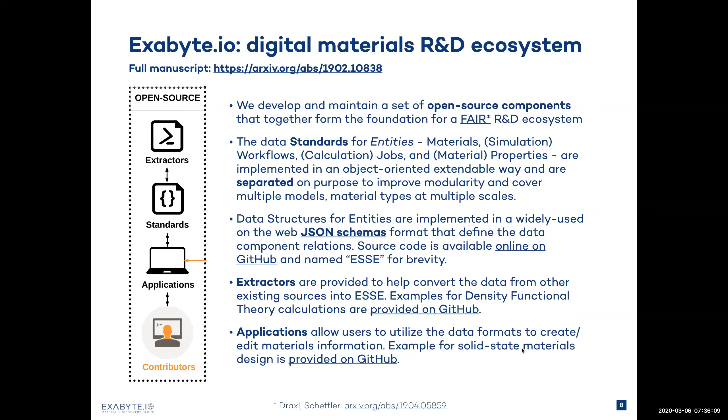Lastly, the applications allow users to utilize the data formats to create and edit materials information. We have a couple of examples of JavaScript standalone applications that we use inside our platform as well.

Here is the platform as it's added to the open source component. Again, we reuse the open source components inside platform.exabyte.io, accessible to everybody. These components can be further licensed and deployed in a private scenario too, for people who feel sensitive about sharing their data. We start with computational materials sciences as the very well-known scenario to us.

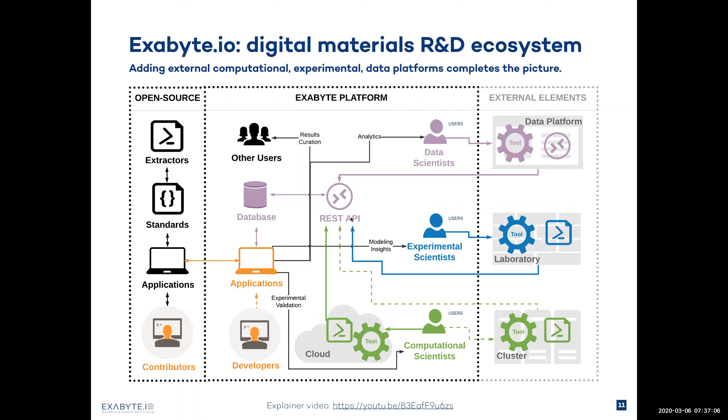But we also support data science workflows and have on the roadmap support for experimental scientists and their work. In the last two cases, we would necessarily have to add external elements like the data platform that data scientists work with today, and the laboratory equipment that can provide validation data points to our data infrastructure, to make sure that the work computational scientists are doing in fact represents experiments very well.

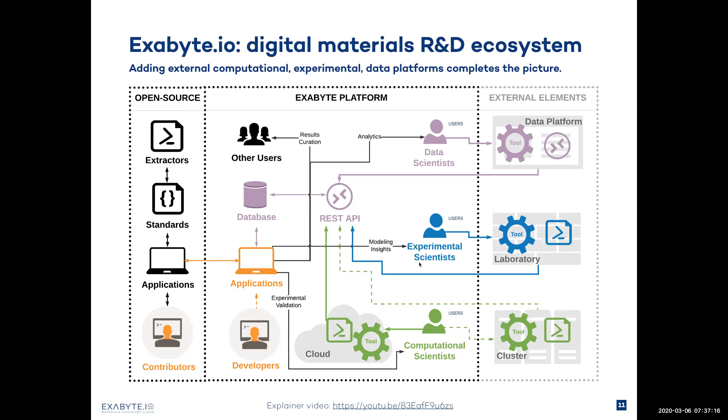If we think about the digital materials R&D lifecycle, we can identify 7 different stages: designing materials, designing modeling workflows, provisioning high-performance computing infrastructure, controlling the calculations, collecting the data, and building data analytics. The way we position the platform is to provide all of these steps within one single framework.

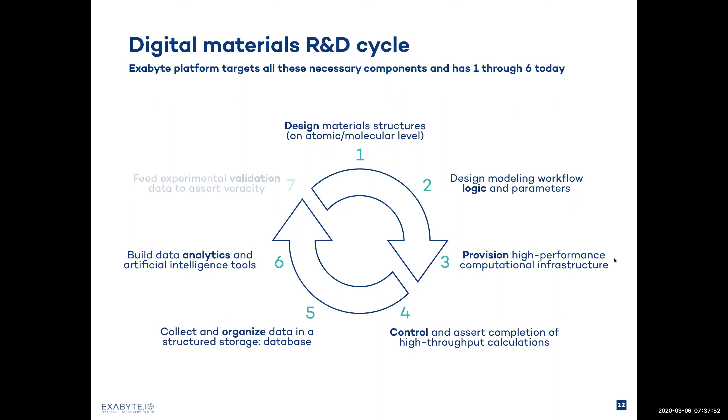I will demonstrate some of this to you right now. First, here is an example account page, and you can see there are multiple people listed on this account, and multiple entities like materials, workflows, and calculation jobs. There is a snapshot of the infrastructure available to this account and a bit about its current state.

So when people want to design new materials, they can do that online. Here is a quick example for a semiconductor thin film supercell.

Another functionality comes from the chemistry domain and nudged elastic band calculations, where we can set up the chemical reaction path and code it in at the atomic level. In this case, we see the hydrogen atom moving inside a larger cell, representing a chemical reaction.

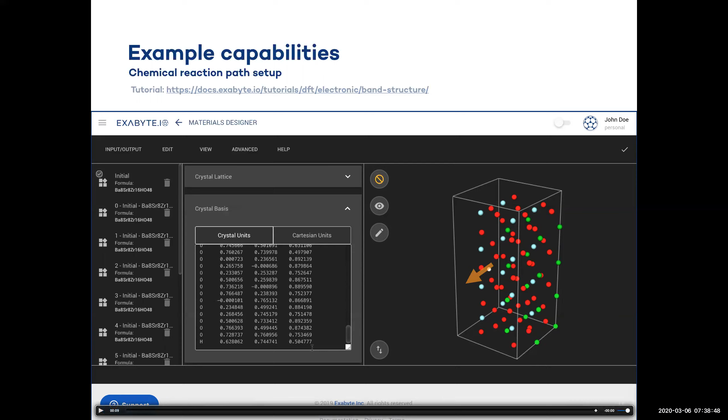Once we have the structures, we can set up the calculation workflows that can characterize these material structures. We have a set of workflows that are templated and available for users to select, and each of these workflows, when selected, represents a certain logical flow.

As you can see here, for example, we have a relaxation at first, and then we do convergence, and then at the end we calculate the desired property.

So the workflow engine is included into the platform, as well as the computational infrastructure. We can select to run either on Amazon Web Services or Microsoft Azure, scale to a certain number of cores, computational nodes, all of that is included.

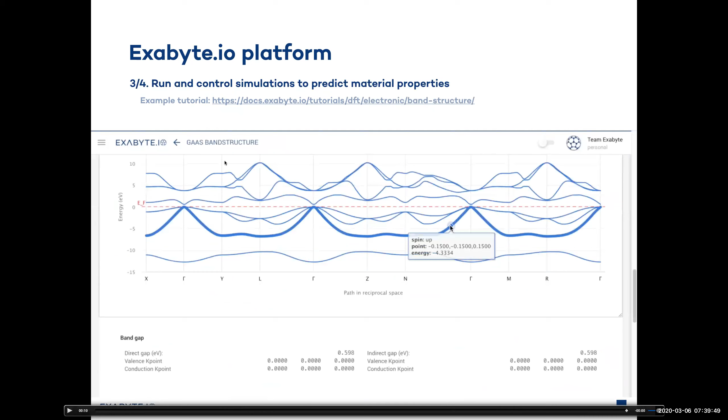Once we're done with the setup, we can execute the simulation and track its progress, as this visual demonstrates. At the end, when the calculation is done, we get the result in the form of a figure, like the band structure in this case, or the chemical reaction profile for the NEB images that we initially created.

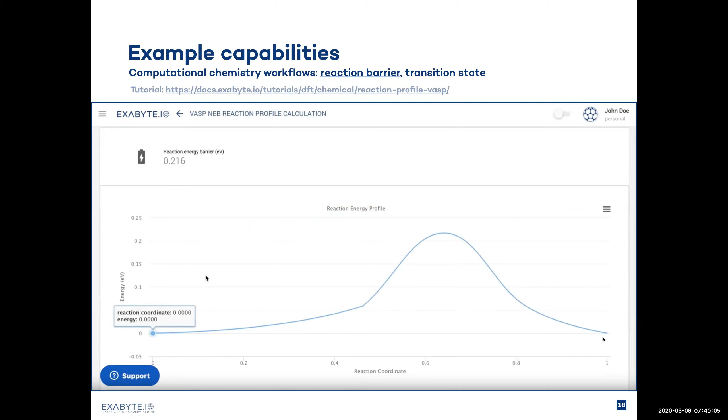All of this information is stored in a database that can be accessed programmatically through the RESTful API. Most of the time when people repeatedly run these calculations, they have some sort of scripting routines that they prefer, and we support programmatic access to our platform too.

In this demonstration, we use Python to import materials, create calculation jobs, wait for them to finish, and then assemble a data frame that can be used to build a machine learning model. This is handy when we have a high throughput set of calculations, perhaps running through dozens or hundreds of different material formulations.

All right, this is just a quick demonstration. Another handy tool we have incorporated into the platform is Jupyter Notebooks. The data produced by simulations can be accessed within the Jupyter runtime, and because they run on the same infrastructure, they have access to the same exact hardware and data.

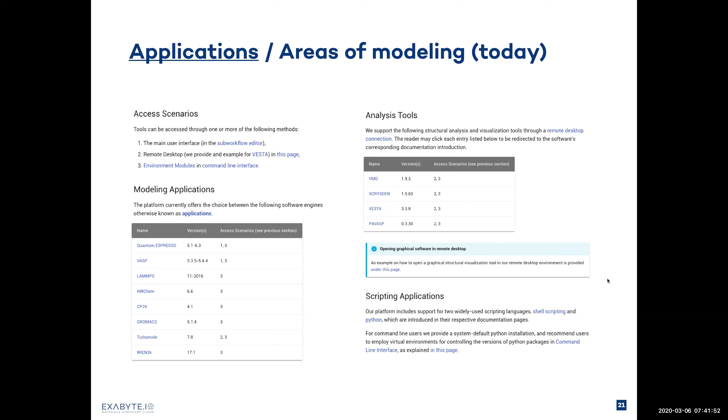For analysis tools, we support VMD, XCrySDen, Vesta, and we can install other analysis tools that our users would like to use. We also have support for Python and shell scripting at the core, and Jupyter, as I just demonstrated.

All of these tools can also be accessed at the command line level. People who are familiar with that workflow can set up batch scripts and submit those for execution to our resource management system, and they can select environment modules to be used within the batch scripts.

Here is a quick demonstration when we open a web terminal. We navigate to the web platform, select terminal from the right-hand sidebar, and then we can use the command line terminal from the browser.

Okay, so I'm done with the first part of this overview. Here is the midway summary. Exabyte.io is really a comprehensive ecosystem for materials and chemicals R&D, and our goal is to transition today's isolated, fragmented approach to a data infrastructure that is ready for data-driven science.

Today, we see a transition from simulations-driven or theoretical-driven science to data-driven science, where sometimes we don't know the underlying equations, but we can still apply artificial intelligence to see the trends inside the data that we produce.

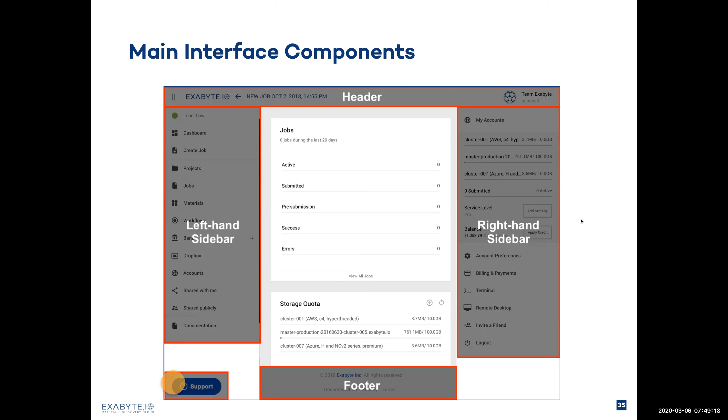So let's start with the support widget because that's the most important component in the beginning. So when you click on the support widget, it opens up this form where we ask for your name, your email address, and a little explanation of the problem. We encourage people to submit a screenshot or screencast of the problem because otherwise it is very difficult for us to understand the nature of it. Sometimes this could be an interactive chat when we have people standing by to answer the questions. And most of the time it will be this form.

There is also a chat window present on the right side of the screen, but we discourage the use of it. It's only meant for the people who are not logged in yet to assist with any kind of problems during the registration, during the login process.

Next, let's speak about the header. So in the header, we have in the top left corner a trigger that can open the left-hand sidebar. Okay, and here we have links to all the entities that are created by this account, including materials, jobs, workflows, and others. So here, once we click on the left-hand sidebar and say materials or projects, we'll get to the account page that allows us to further navigate to all of these items.

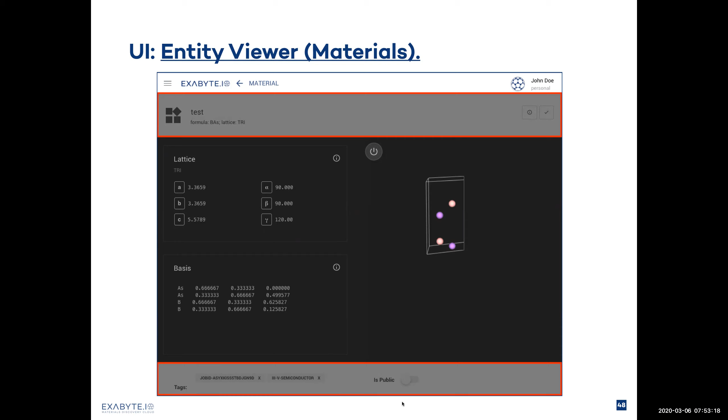Next, let's speak about accounts and sharing very briefly. Accounts can own and perform actions on the entities. So accounts really define the different ways of how users, humans, can interact with the platform. And accounts have multiple or only one member, depending on their type. If that's an organizational or team account, it can have multiple members. And if it's a personal account, by definition, it only has one.

Organizational accounts can have different permissions on entities, based on the teams. So there could be a team that only has read permissions, and there could be teams that have read and edit permissions, and so on. Account members have shared access to entities, and this shared access type is set by the account administrator.

We also introduced the entity collection, so the collection of entities that belong to a particular account. And we have the notion of the entity bank. So entities are collected per account, and each account has an independent entity collection. Unique entities across different accounts are collected inside a bank, as we call it, using a mapping function. So for example, if there are two accounts that created the same material, and we know that it's the same material based on the structure, then all of them will be pointing to the same entry inside the entity bank.

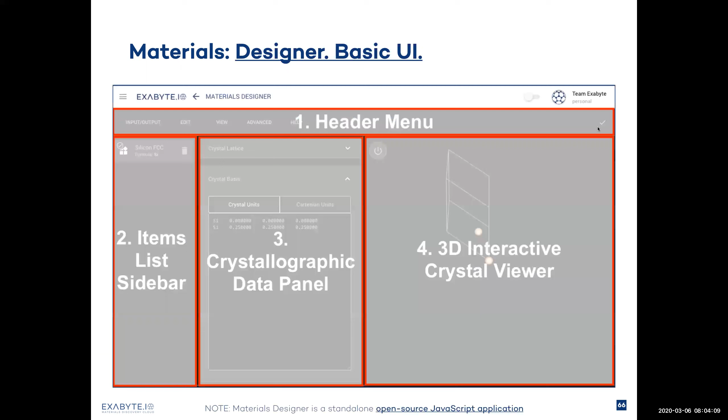To navigate to the designer, let's click on the Create button that is available in the Actions toolbar for materials. When we do that, we are presented with the Materials Designer interface. And again, it has the header menu at the top with multiple menu options. Here's the items list on the left, which contains material entries that are currently active inside the designer session. And we have the crystallographic data panel in the middle, and the 3D crystal viewer panel to the right.

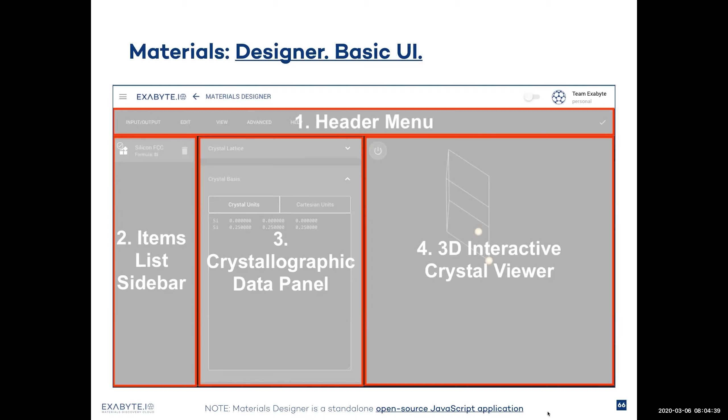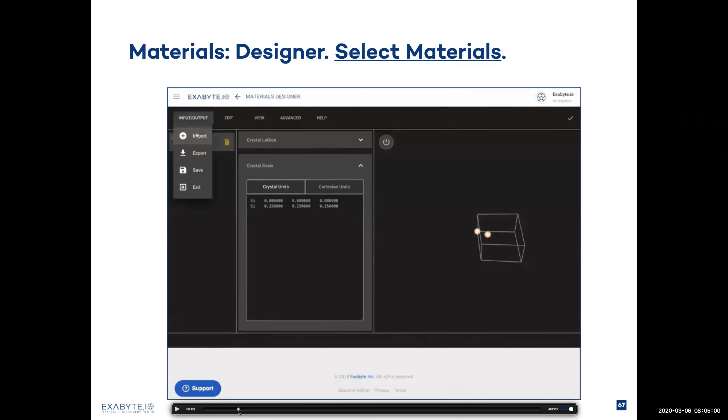So let's look at an example usage pattern where we import a material from our account collection to further edit it inside this Materials Designer session. First, we click on the input-output menu in the header, and we select import inside the menu. It takes us to the import dialog, and in this case, as the import dialog has it, we are importing materials from our own collection.

So again, the way that we designed the platform is that any kind of edits to the material structures are reflected inside the account-specific part of the materials collection. So we always work with entities that are owned by the account when we edit them. But before editing, before the account contains any kind of entities, we have to import them or upload them as we just discussed. So here I'm importing a material from the account collection to further edit it inside the Materials Designer.

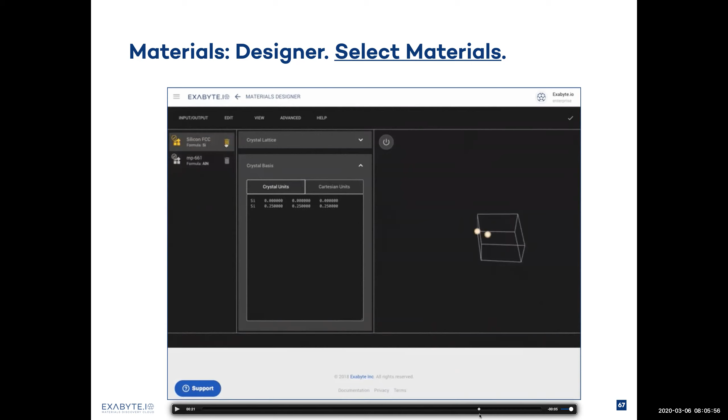Okay, and now I have 2 entries on the left, silicon FCC and this MP661. So let's remove the silicon, which is the default entry. And now I have the aluminum nitride as the entity here that I can work with and modify the structure, adjust the crystal lattice, adjust the basis. So do 3D manipulations with the structure inside Materials Designer.

I will not focus on how to do that here in the session. Let's do that in the advanced topic seminar coming up in a couple of weeks.

Next, let's proceed to the second entity that we discussed, the workflows. And just like with materials, we have a bank, the platform-wide workflows bank, that contains all the unique workflows that users have created. And for someone who is just starting with the platform, we think that the best way to start is to import one or more of these workflows.

To do that, again, we open the left-hand sidebar, click on bank and then workflows. And we can see the list of all the workflows that are present in the bank. If we want to calculate band structure, then we can search for band structure as in the workflow name or the property that it extracts. And then we select the band structure workflow at the top.

Again, in this demonstration, we do not have the creator name in the list, but it can be also shown by clicking on these three dots and selecting creator as one of the fields. And we suggest using the workflows that are created by the curator's account. Okay, when we click on copy, we see that the item is copied to our private collection. And when we navigate back to the list of workflows, we see the copied workflow at the top.

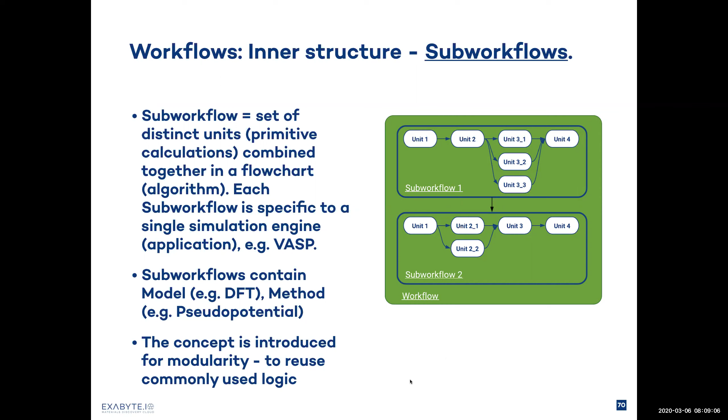And each sub-workflow is specific to a particular simulation engine. For example, if you use VASP, or Quantum Espresso, or LAMMPS, then a sub-workflow can only contain a single simulation engine, like VASP. A sub-workflow can contain a single model and method as well. So it's density functional theory, pseudopotential method, and a sub-workflow can only contain one. This concept is really introduced for modularity, to be able to reuse some commonly used simulation logic.

A unit is an elementary calculation. It is executed in certain succession based on the logic inside the workflow. And it can represent things like a condition, in case we do some sort of a convergence study, or it could represent a MapReduce workflow. Depending on the logic that we include inside the sub-workflow, we can have different kinds of units. So units can have execution as their type, for example, to run a Quantum Espresso calculation, they can be of an assignment type when we assign a variable, or a condition as a type.

Execution units can have different executables associated with them, for example, pw.x. And execution units can also have different flavors, like pw_scf, to make this process modular and reusable. So the pw_scf unit has a certain input file associated with it, and it also uses pw.x as an executable.

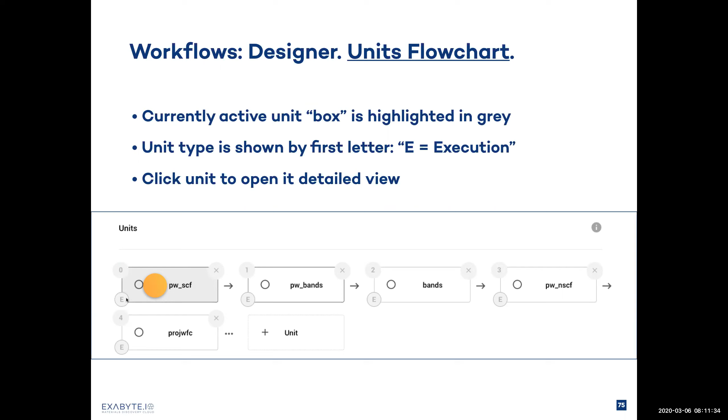So if we look in more detail at the units flowchart, we'll see that the currently active unit is highlighted in gray, and the unit type is shown at the bottom of the box. So E means execution. When we click on this item, we can see its content. But before going into that, let's understand how the logic is represented.

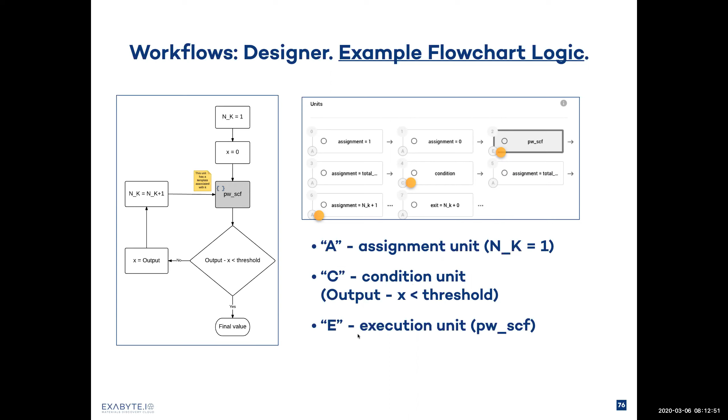This workflow presently is represented by this visual. So the workflow on the left and the workflow on the right do exactly the same thing. And A here represents the assignment unit where we set up the n_k variable. C is the condition unit where we check whether the output, which in this case is the total energy, minus the output at the previous step is less than the threshold. And E is the execution unit where we do the calculation itself.

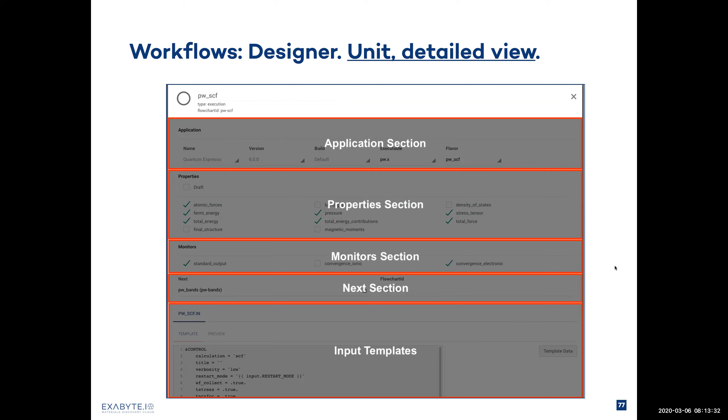And in order to understand the templating logic, we have to look at the content of the input template. And we'll see that there are curly braces that represent the variables that this template has inside itself. These variables are being populated based on the metadata that comes from materials. So the way that we render the final content of this input template is based on the material that we associate with this job, right?

In the beginning, I said that a job is formed when we have materials information passed and put together with the workflow information. So before there is materials information, we really don't know the final content of this input file. We only have the template. But if we bring the information about the material structure, like the unit cell parameters or the atomic species, we can render the final textual output for this workflow, which contains the materials information as well. And that is what we call the first render, the first render that happens on the web.

And as you can notice, there are some variables that are still present even in the rendered text. And that's because really for the user, it doesn't matter which working directory we are going to assign to this job. And when we copy this textual file to the infrastructure, we substitute this job working directory variable at the runtime. So that's what we call the second render that happens during the runtime. And at the end, we pass the fully substituted input file to pw.x to execute this calculation.

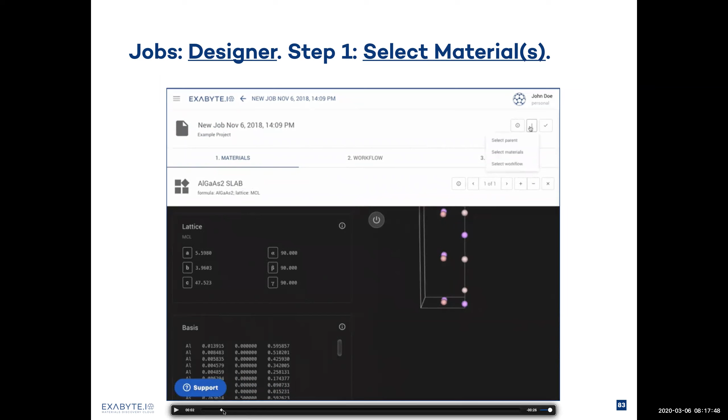We start by going to the materials tab and selecting materials for this job. We can select multiple materials by clicking on the dropdown in the header and clicking select materials, then selecting multiple entries inside our account collection. Here I'm selecting 6 materials and clicking on the action at the top. Now the materials tab contains 6 materials that I can scroll through to visualize their structure quickly.

What's important to notice here is that the formula keyword variable was added to the job name. In the beginning we didn't have it, but at the end we see it's added. Because we have 6 materials, we add a material formula to the name of the job automatically to make it easy to understand which job corresponds to which material.

The second step is to select the workflow. Just like with materials, we can open the dropdown at the top, click select workflow, and select one entry inside the workflows list. Unlike materials, we can only add a single workflow, because otherwise it would not be clear which calculation we're actually running. After selecting a workflow, we can see the logic inside it using the workflow tab.

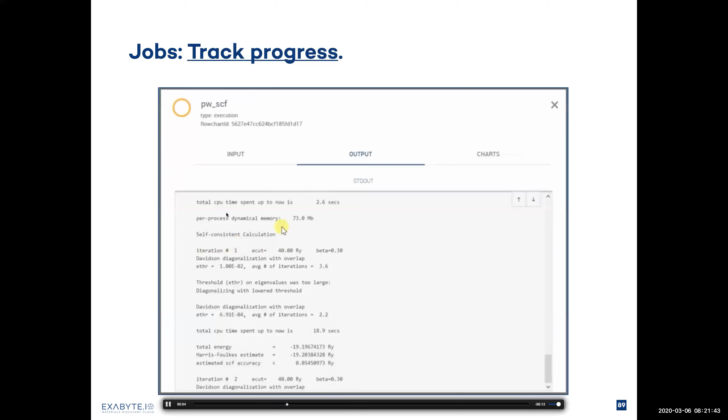We can navigate into this job, open it, and track its progress. The currently active unit is shown in orange. We can see the standard output of this job, and we can see the convergence graphs associated with it. As the calculation progresses, the units shown in green are finished, and the units currently orange are presently running.

At the end, when all the units are complete, the job also turns green, and the status is shown as finished. When we navigate into the finished job, we can see its results, arranged per unit.

So pw_scf extracted total energy, pressure, Fermi energy, and total force. And the bands unit extracted the actual band structure plot. If we come back to the top, we can also navigate to the list of files that this calculation produced, and we can preview or download each of these files to disk.

So this is a quick demonstration of how we can run a simulation job by combining together a workflow and materials.